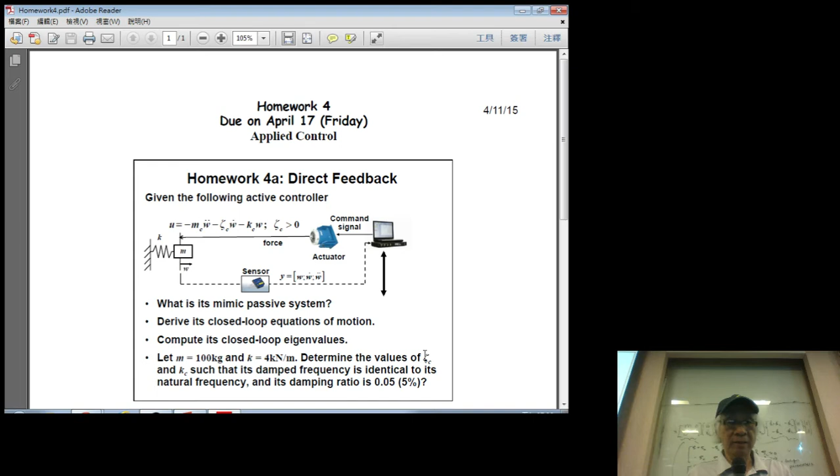The value may not be unique. So the student A and the student B may have different design values of MC, zeta C, and KC, and they will achieve the same 0.05. By the way, here I just say zeta C has to be positive. I didn't tell you that MC has to be positive. I didn't tell you KC must be positive, but that's up to you. You can choose that. But anyway, we'll see what happens. Just give you some exercise.

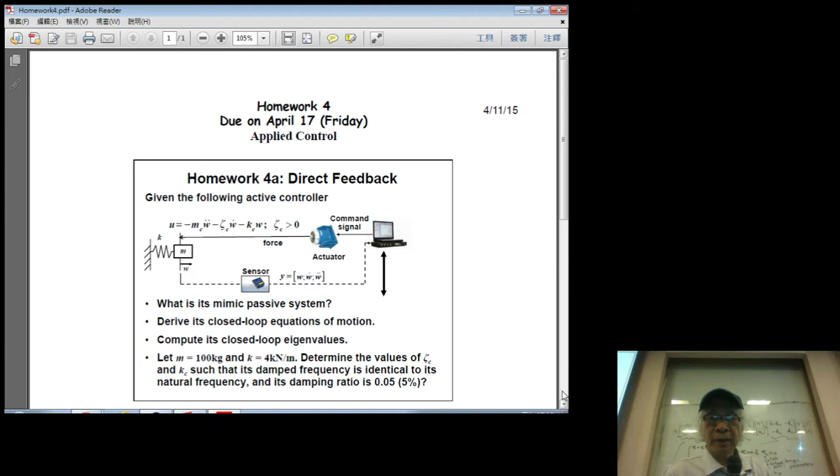All right, and then I think the second part will be even easier, and that's the value there. You can just check it. I think that's probably answer all your problem now.

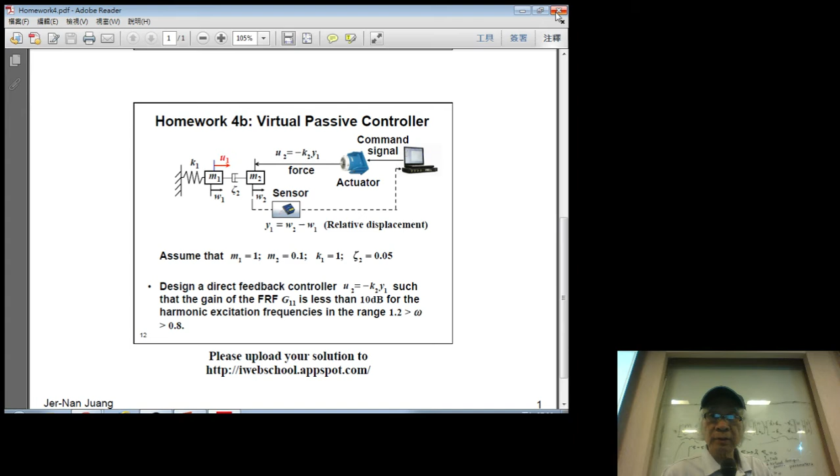And now we need to change back to that guy. We change back to this. And how can I change back to this guy here? And lecture now. We need to change that. Okay. Yeah. All right. Just wait a second. Let me move back. Yeah. How can I? Okay. So that's to the 26, to the 26.

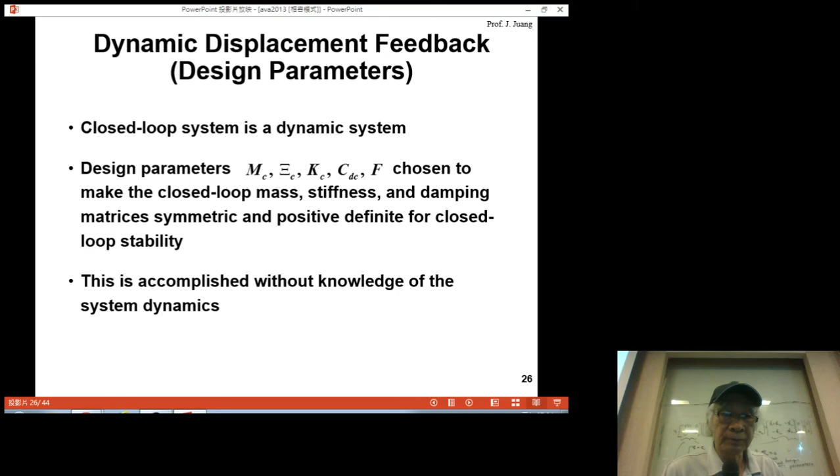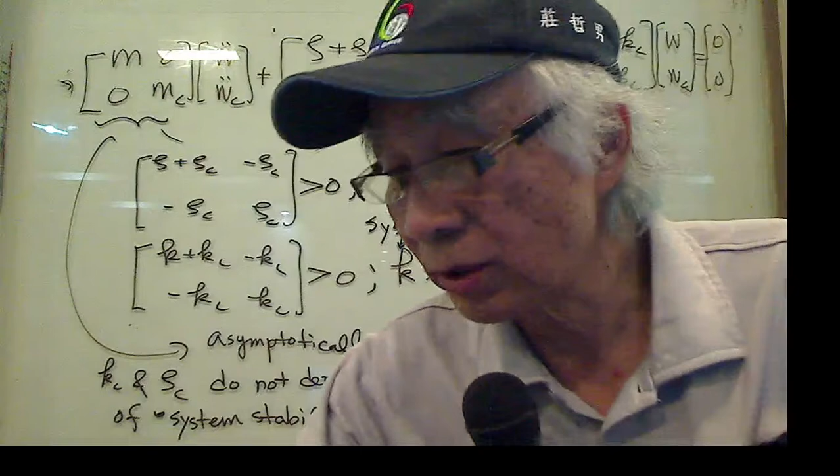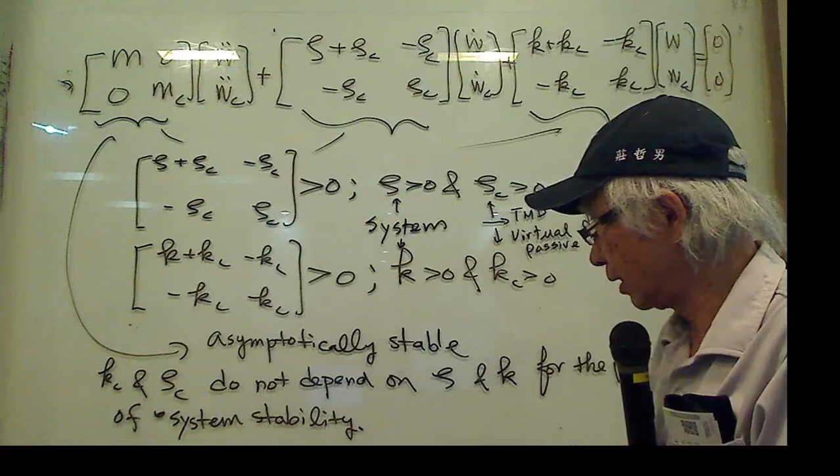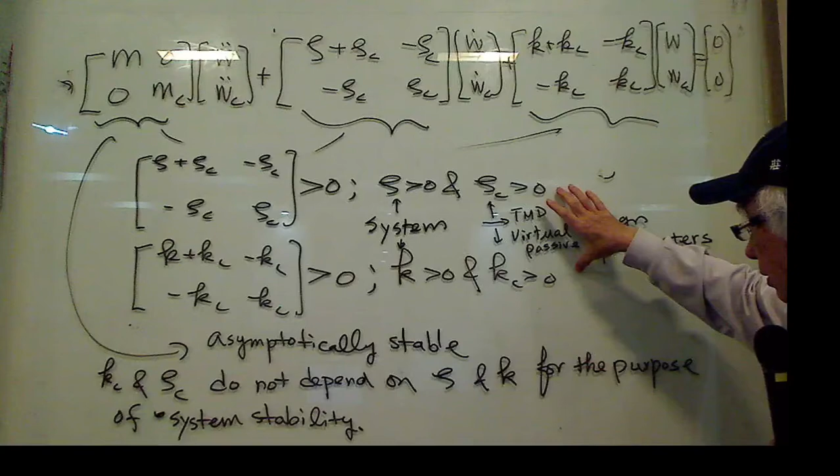All right. So I'm going to explain. I have a request to explain this again. Some of the students still don't understand my last questions. The last questions just saying this: the system parameters like zeta and k, doesn't matter what kind of system parameters you have. This can be 0, or this can be any value, as long as I choose zeta c and kc positive, the system always be stable. They will never become unstable.

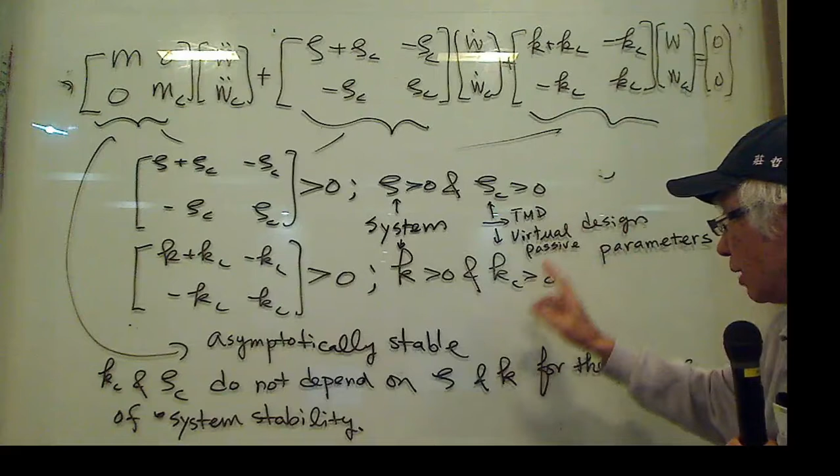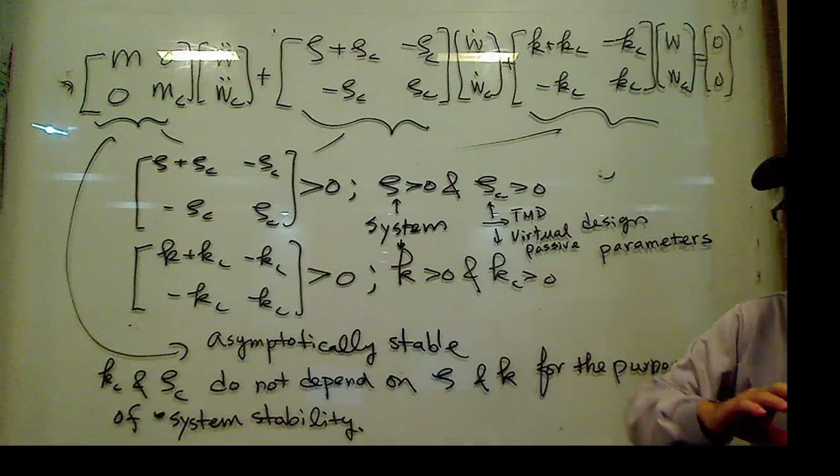That's what it means. In terms of system stability, zeta can be any positive value, k can be any positive value. My design parameter zeta c can be any positive value. In other words, zeta c is not function of zeta. Kc is not function of k. Now, in control, there are many other control methods that the zeta c and kc cannot be randomly chosen. Kc and zeta c may be function of zeta and k for the system to be stable.

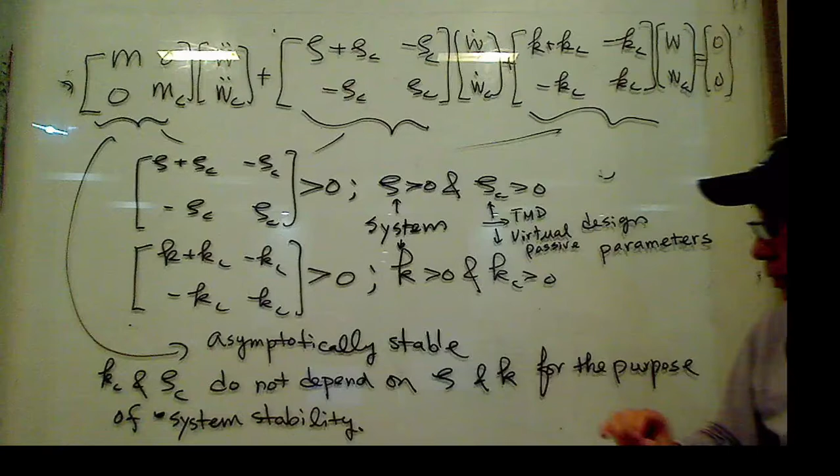And this is the method that, in terms of system stability, zeta c and kc, as long as they are larger than 0, regardless what kind of value you have for the system, is always stable. However, the performance may not be good. So this kind of design won't make system unstable. Understand that? There are many other control methods where even with zeta c larger than 0 and kc larger than 0, the system may be unstable. Understand that?

So if your zeta C and KC are larger than 0, this is for the homework. This is why I give homework 4. Homework 4 just says, although they are stable, if I would like my damping to be 0.05, then you have to choose the right zeta C and KC such that your damping is 0.05. Understand now?

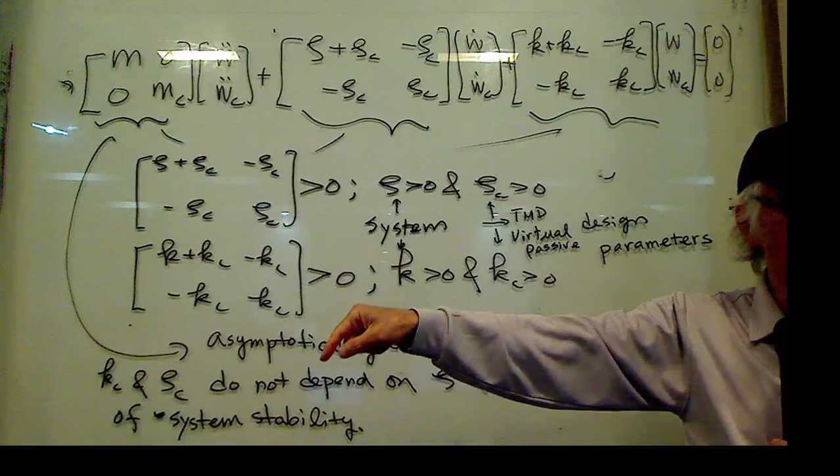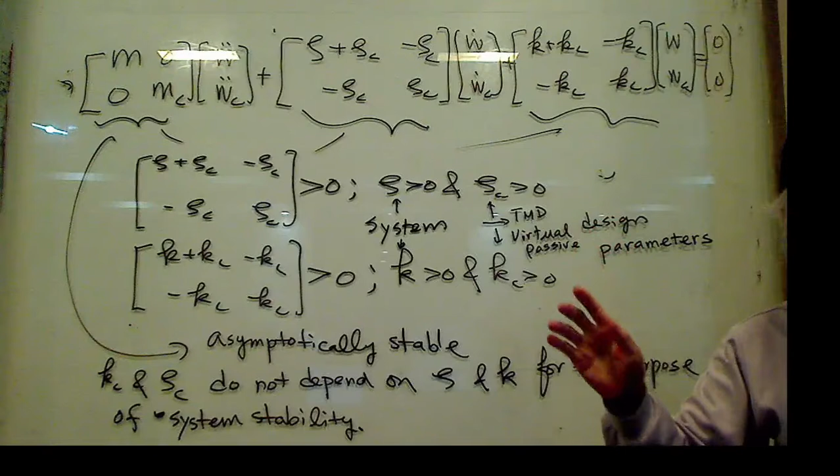So if you want a specific damping, then of course you have to choose the right zeta C and right KC, and they are all positive and also give you the damping you want. If you don't choose the right zeta C or KC to get that 0.05 damping, fine. They won't give you the 0.05 damping. They might give you 0.0001 damping, very small damping. However, it will never become negative damping. It won't be unstable. Understand now? That's why homework number 4.

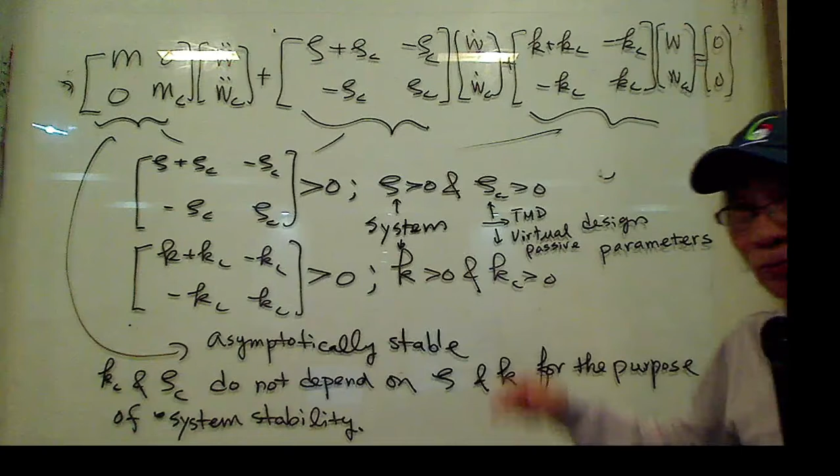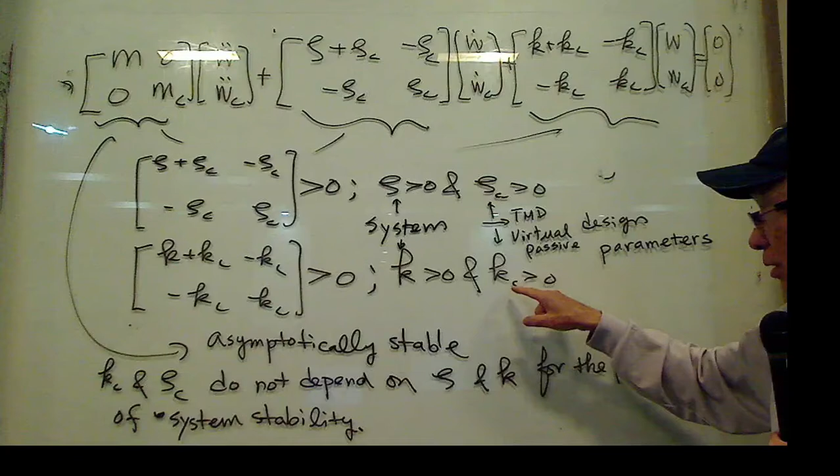Homework number 4 specifically lets you design MC, KC, and zeta C such that your damping is the damping you design it to be. Okay? The stability doesn't give you the right damping. The stability just tells you that the system is stable. But if you want a specific damping, then you have to choose some value, which is larger than 0, but some value to satisfy your requirement. We call it the performance requirement.

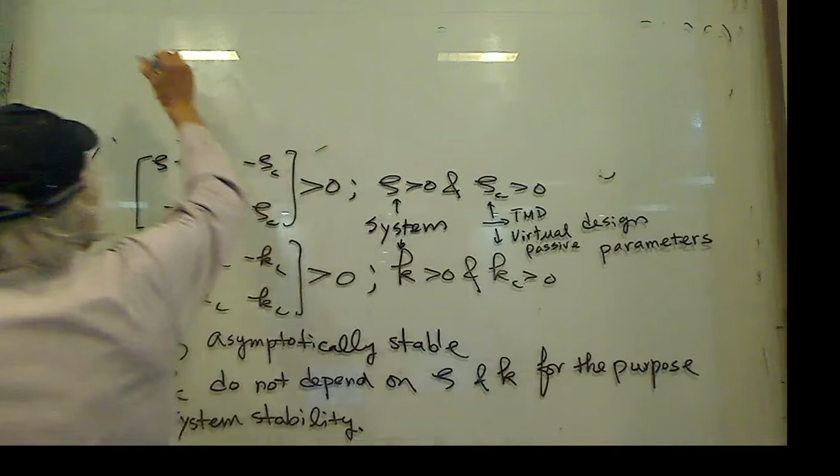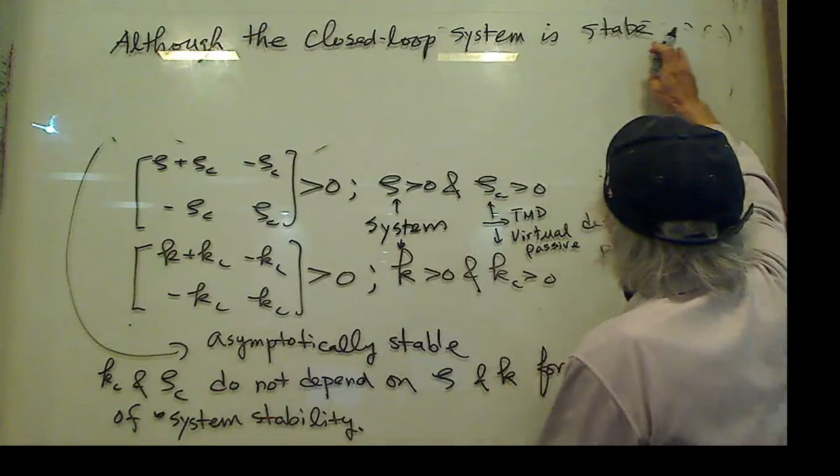Let me just erase that. Although the closed loop system is stable, that's not right, stable as long as zeta C and KC are larger than 0. Right?

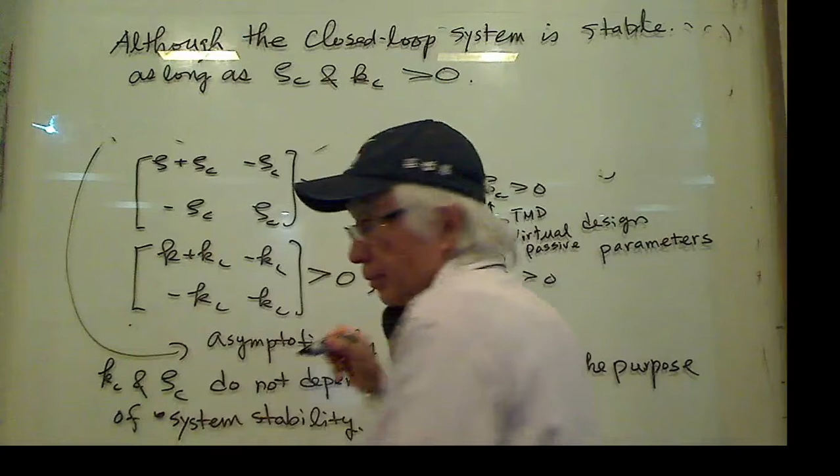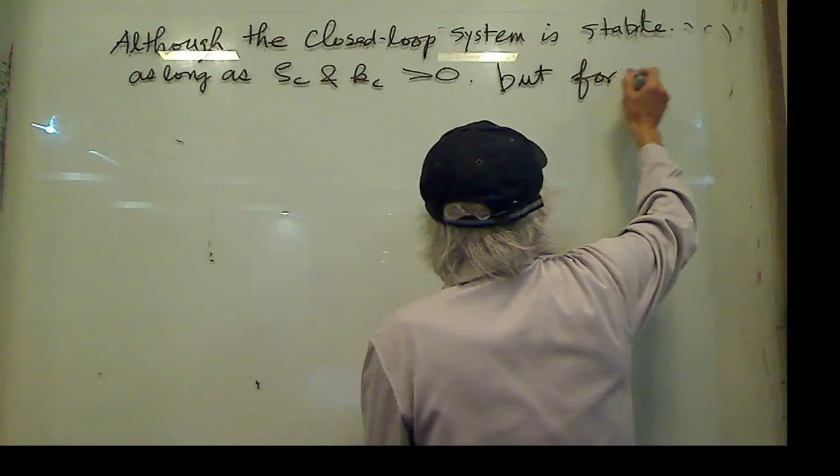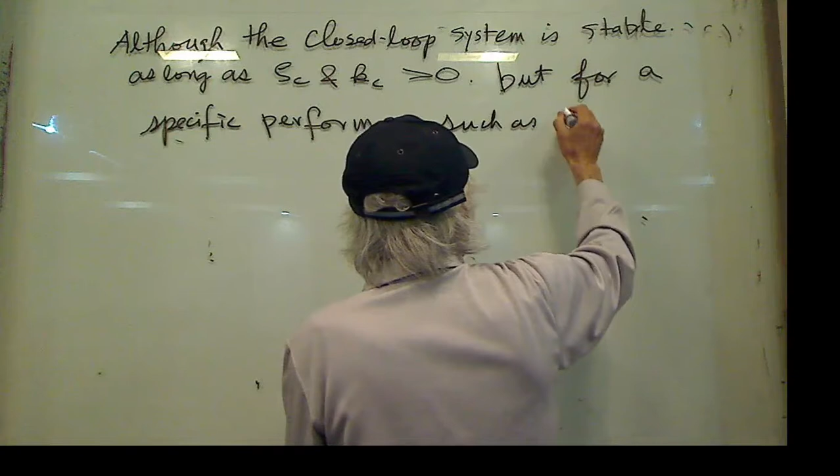But for a specific performance, such as the damping, the closed loop system damping, is 0.05, that means 5% damping,

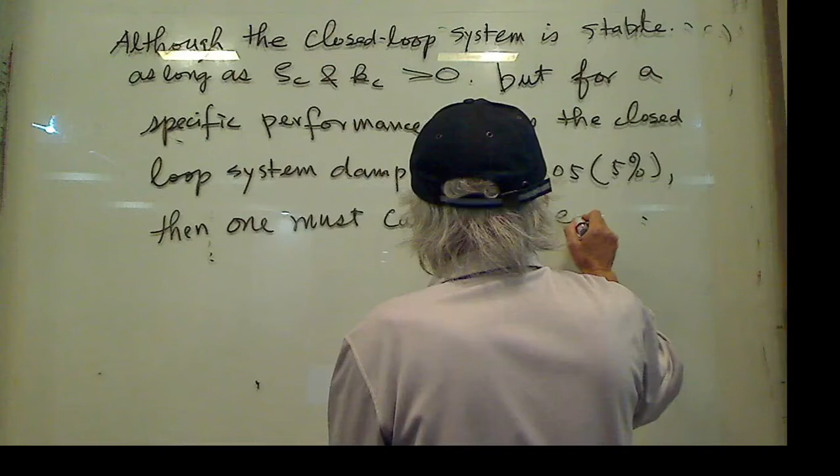then one must carefully select a good set of zeta C and KC larger than 0 to satisfy the performance. Okay?

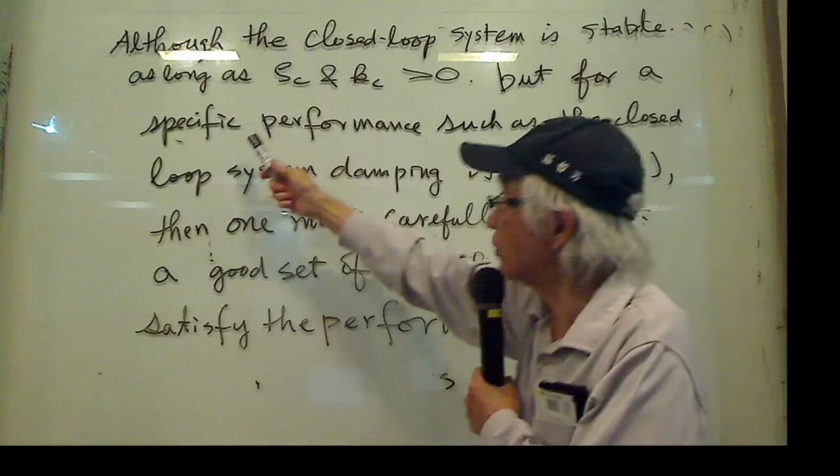Although the closed loop system is stable as long as zeta C and KC are larger than 0, for a specific performance, such as the closed-loop system damping being 0.05, 5% damping, then one must carefully select a good set of zeta C and KC. They are larger than 0.

A good set means a good set of values, a good set of zeta C and KC larger than 0. I say values. To satisfy. So then you need to set up zeta C and KC, the values, to that. And these values. Wait a second. How come this is not? Okay.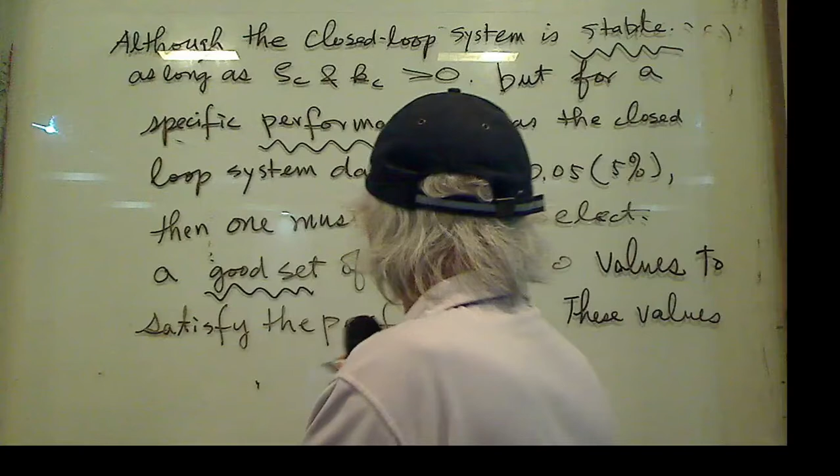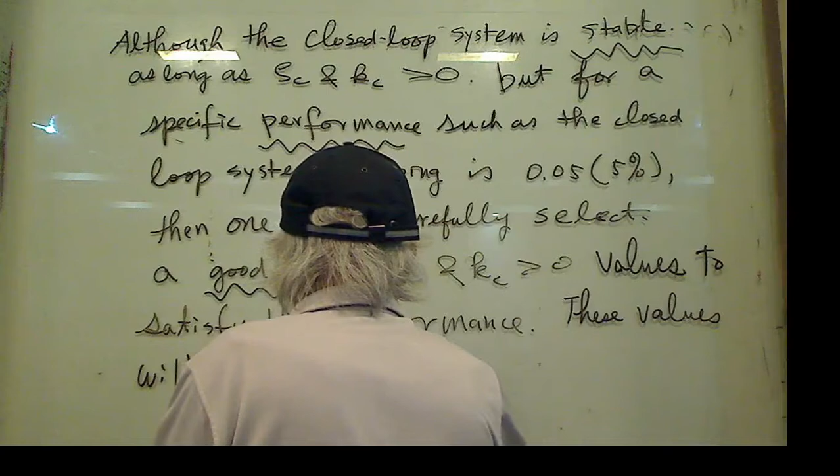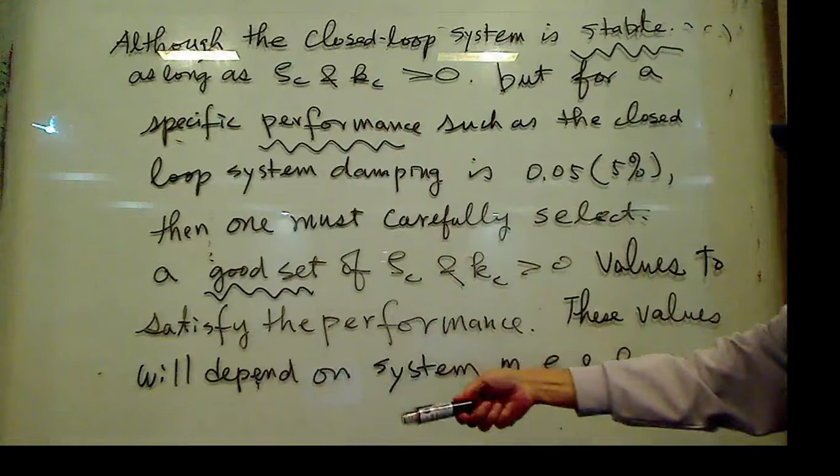Then this value will depend on system zeta and K. Well, it's more than that. This will depend on system M, zeta and K. Now you understand? Okay, this is just to explain the last sentence I wrote. For system stability, as long as they are larger than 0, doesn't matter what value, I don't care. They are stable. However, if I want a specific performance, then zeta C and KC will depend on M, zeta, K. Understand better? No?

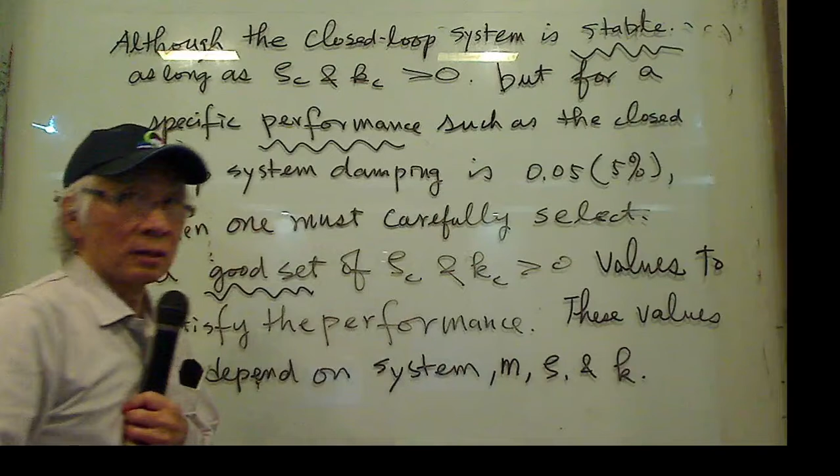Homework number 4. If you do homework number 4, you will feel that to be able to choose zeta C and KC, your system M, system zeta, and system K values are very important. You have to know your system values in order to get a closed-loop system that has damping of 0.05. If you change your system M, zeta, K, then your zeta C and KC will be changed to satisfy 0.05. So anytime you change your system, you have to change that. Understand?

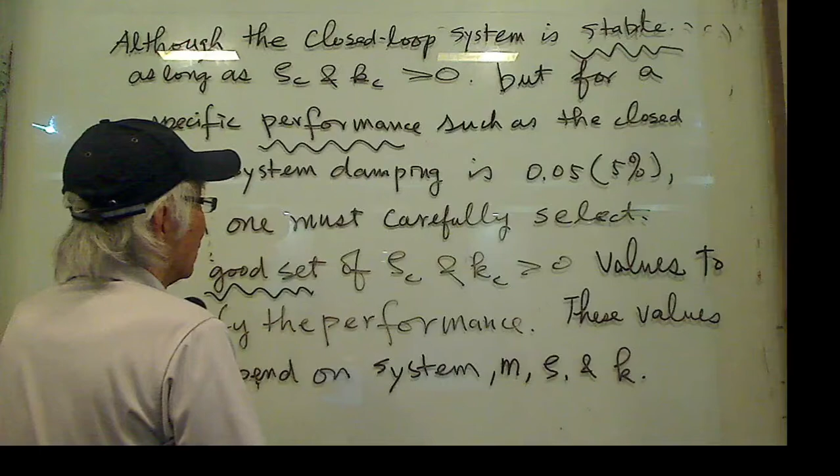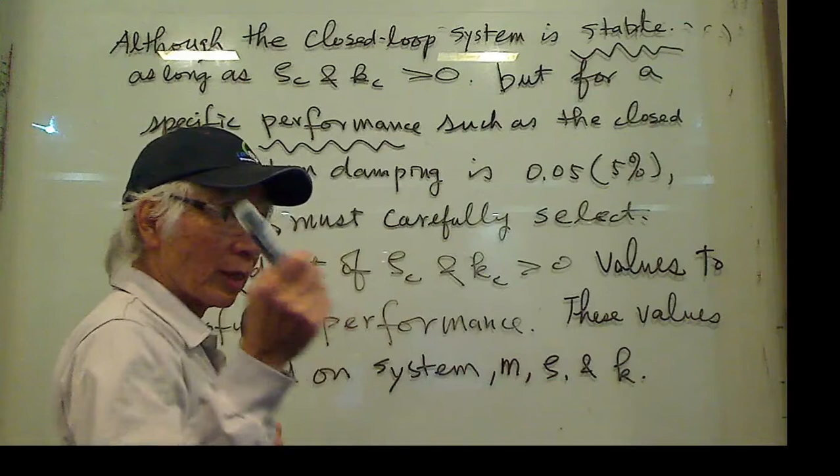But it doesn't matter what M, zeta, K values are. You can change them a lot, to all kinds of values. The system is still stable as long as they are larger than 0. It has nothing to do with the system values. So you have to look at two things. One is stability, one is performance. For performance, zeta C and KC will depend on the system parameters. For stability, they do not. Okay? So for any control, you have to make sure first the system is stable. Second, your performance is right. Understand now?

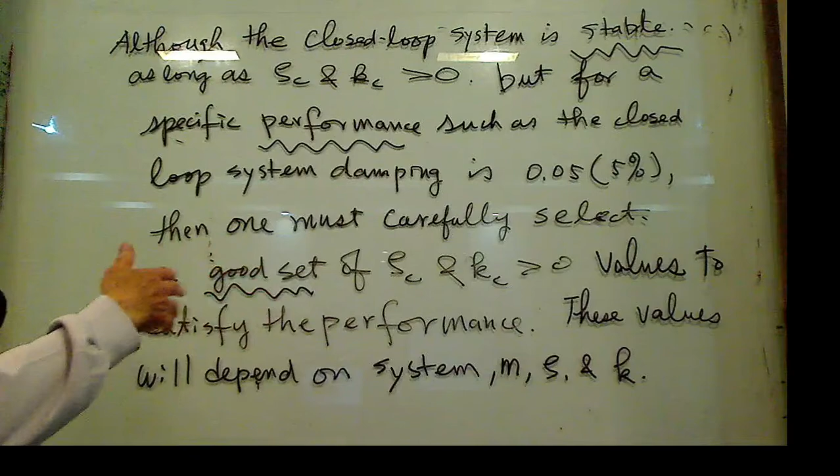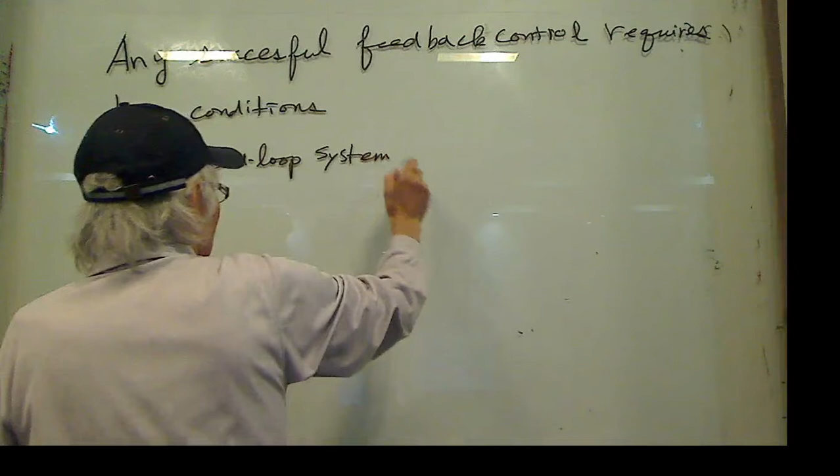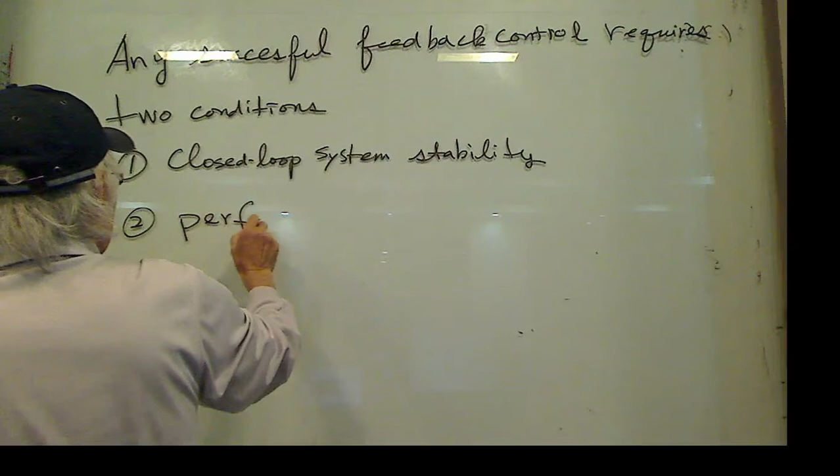Alright. So I think you already copied this. Let me write one more sentence. Any successful feedback control requires two conditions. One, closed loop system stability. Two, performance. Well, this is also closed loop performance.

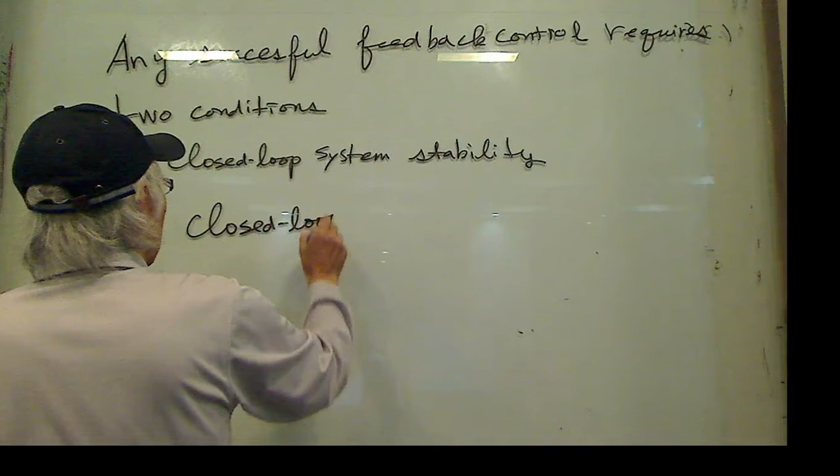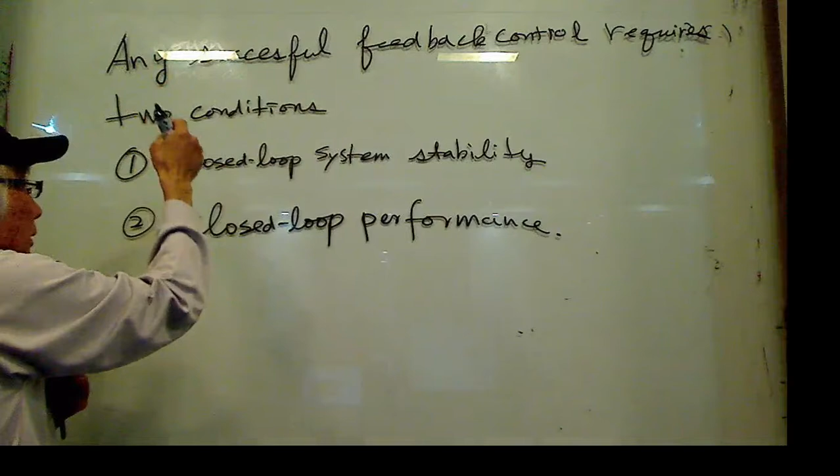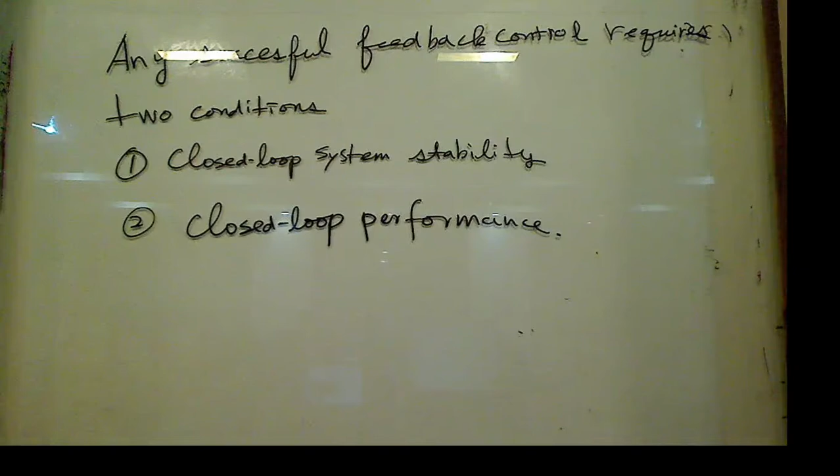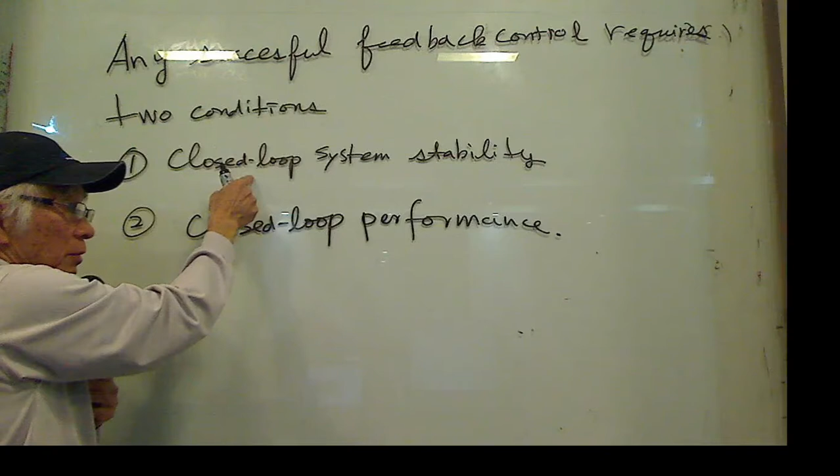So any successful feedback control requires one, the closed loop system is stable. Two, the closed loop performance is right. Okay? You must have these conditions satisfied. The first condition is your feedback has to make sure the system is stable. After you make sure the system is stable, then you make sure your performance is right. Okay?

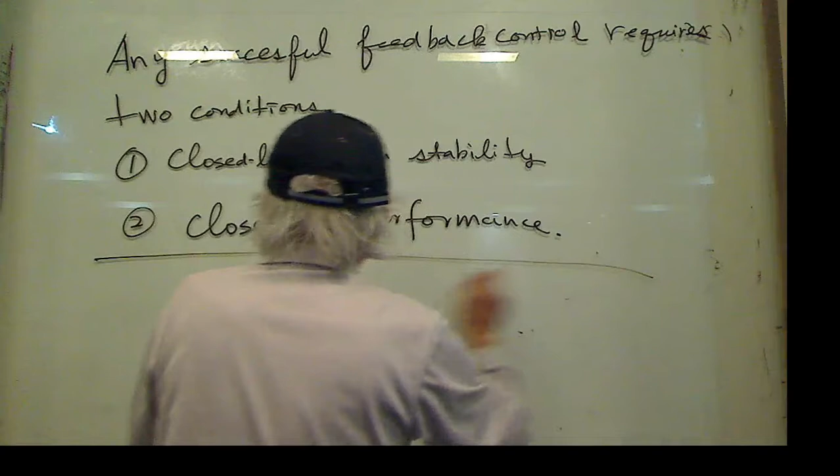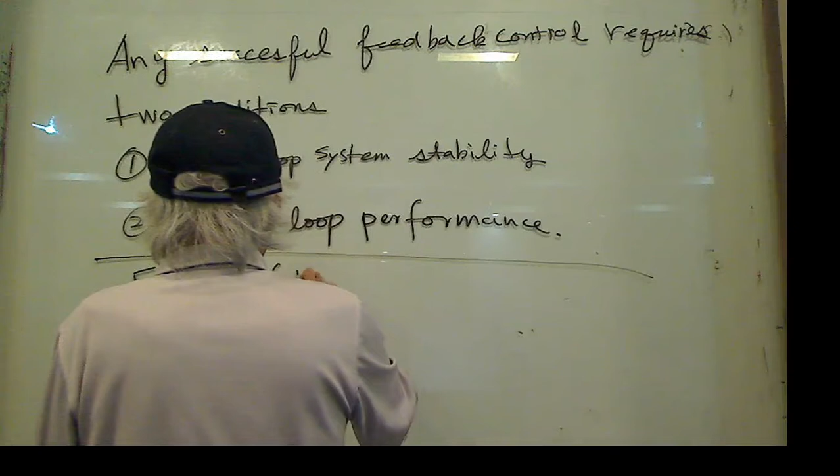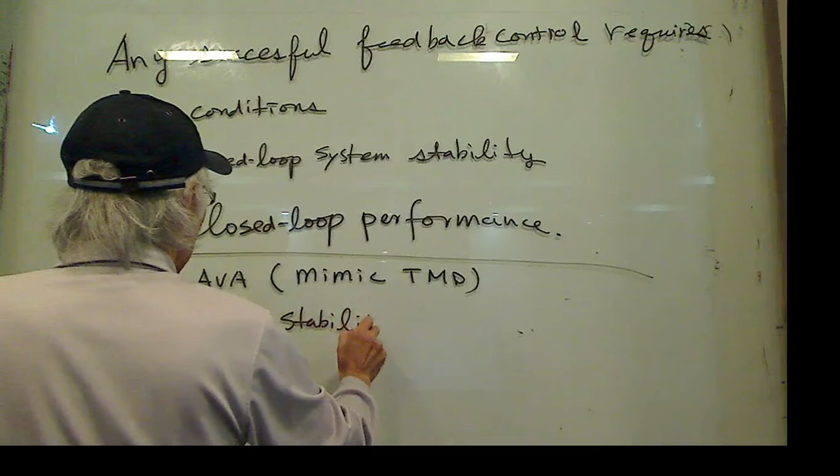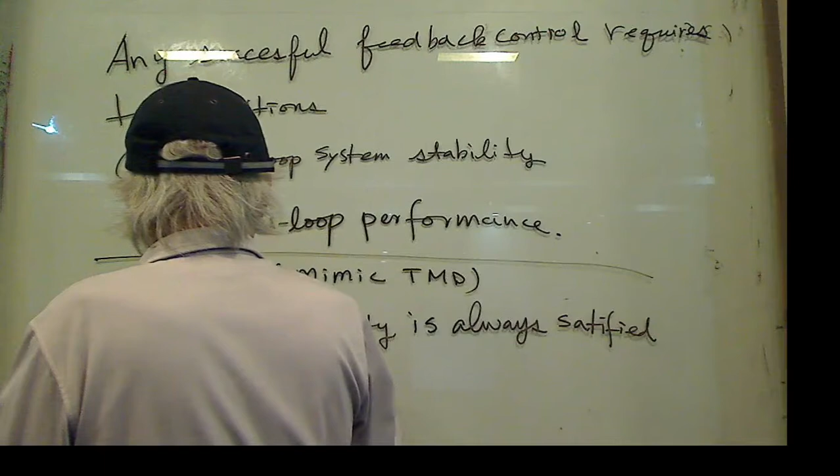Now, for AVA, that means what we are talking about, the one mimicking TMD, system stability is always satisfied if zeta C and KC are larger than 0.

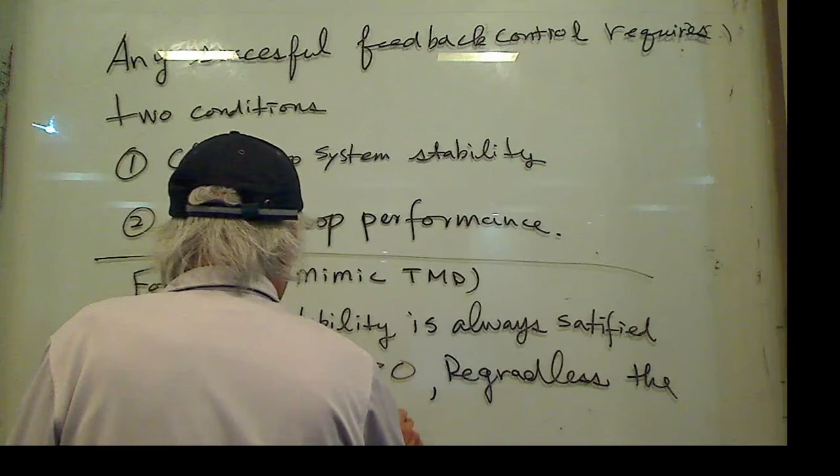Regardless the system, regardless the system M, zeta, and K. All right, understand now?

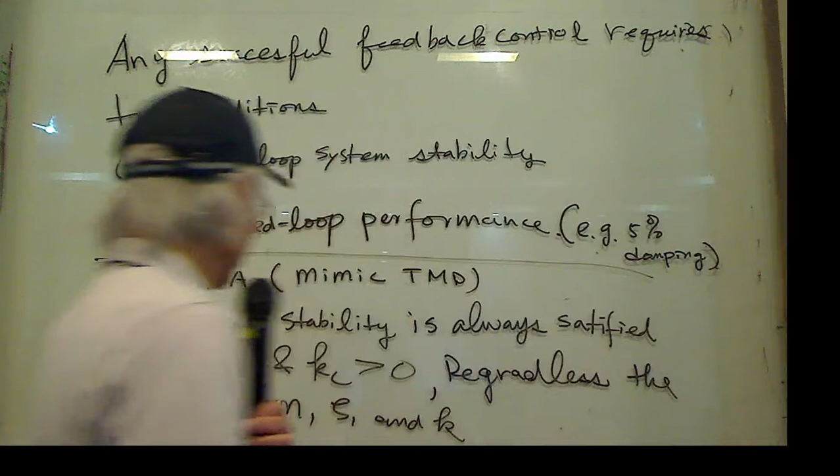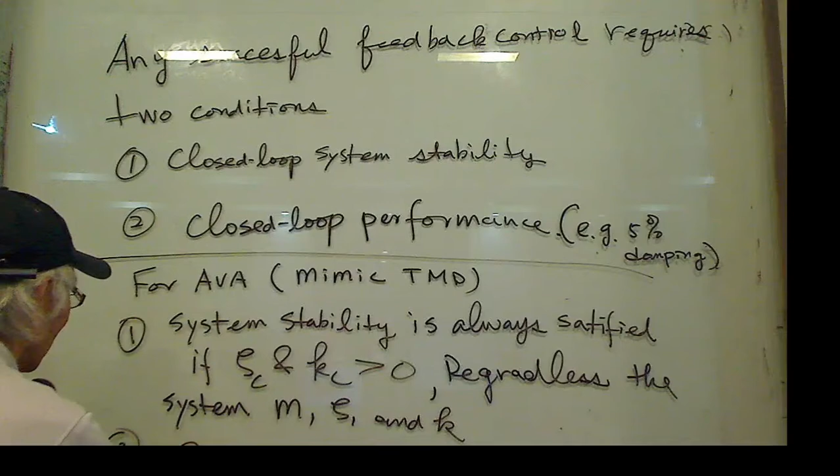But the second one, the performance. For example, 5% damping. For example, the 5% damping. Then there are ZC and KC. Well, a second. Then the second.

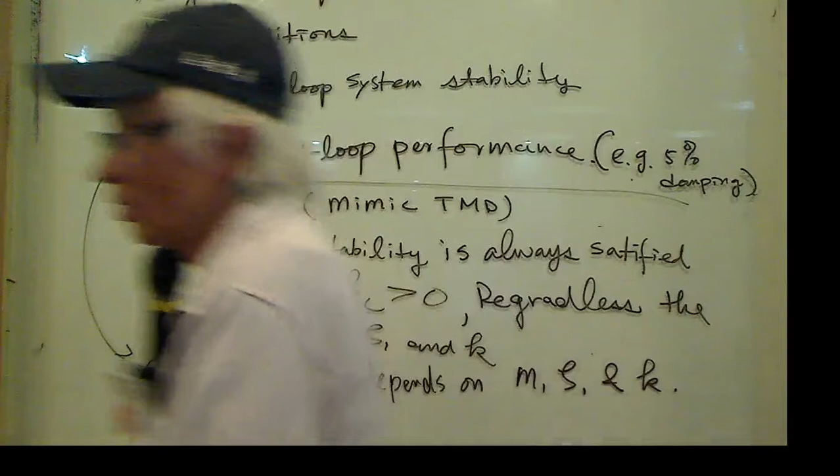So feedback control got two different things you have to do. System stable, performance is satisfied. For AVA, the one we are learning, system stability is not a problem. It has nothing to do with M, zeta, and K, but the ZC and KC depend on M, the system. Now you understand?

Understand? I want to ask, Prof. Why not enough to make the system stable? The system in AVA, as long as they are larger than 0, doesn't matter what kind of value you have, the system is always stable. That means the first condition is satisfied.

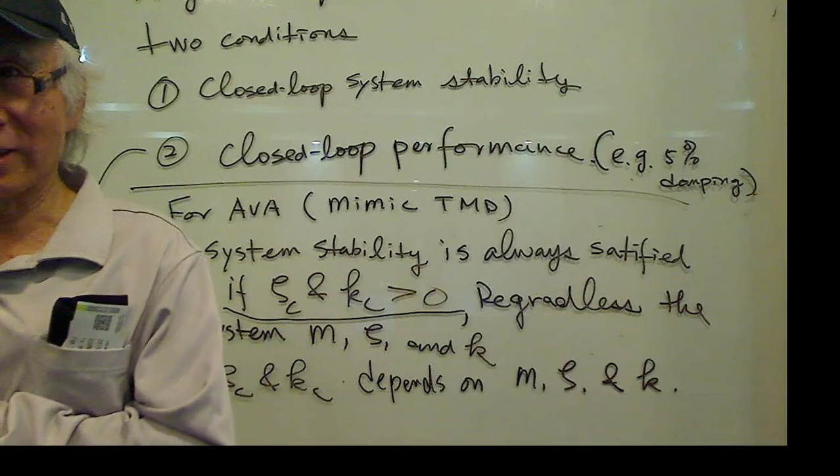Understand now? So you have to consider the system M and the system spring. The system, like 101 itself, they have its own frequencies. Then you have to consider the 101 frequencies, the structural frequencies. See? When you build a system, that system frequencies is fixed. Agree? So then your ZC and the KC has to be chosen to match that frequency.

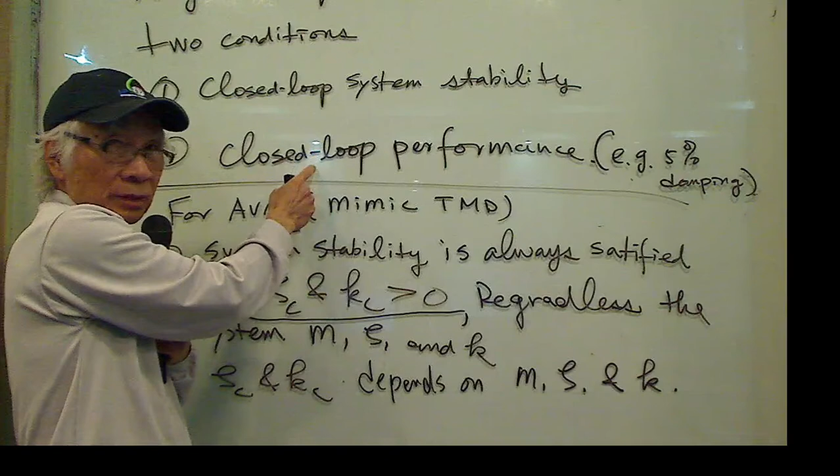It's not only larger than 0. Larger than 0 is the minimum requirement for stability. That's the minimum requirement. But if you wanna have your right performance, then in addition to that minimum requirement, you also have to choose the right value. I say right values.

Okay. How can I calculate the system damping? Oh, the system damping, you can measure it. It's not calculated. If you take the courses of structures, then they will tell you how to calculate the system frequencies and also system dampings. But most likely, the system damping, you don't have a real theory to calculate that. So in many cases, we just assume the system damping is less than 1%. That's by experience, right? But the system frequencies, you can calculate that.

All right. So if you can calculate system frequencies, then if you want to have performance 5% damping, you have to make sure your ZC and KC give you the right 5% damping for the system. If I don't give the right value, then when 101 is moving around, it may move a long time. They won't damp out. If I choose the right value of ZC and KC, then they might damp out in 1 or 2 seconds. All right. That's what we call performance.